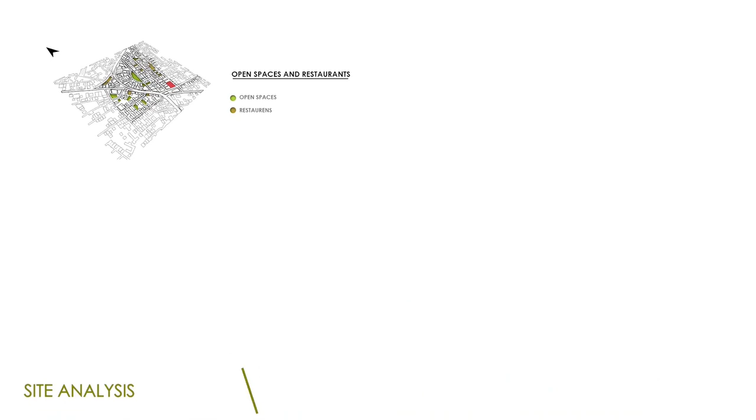The chosen site is located in Ambattur. Ambattur is located in the northwest part of Chennai city and remains an attraction for IT companies. The site neighborhood has adequate facilities like good transport, important landmarks, well-connected roads and restaurants. The neighborhood is majorly commercial and mixed residential. Dense traffic and sparse vegetation is found in the neighborhood.

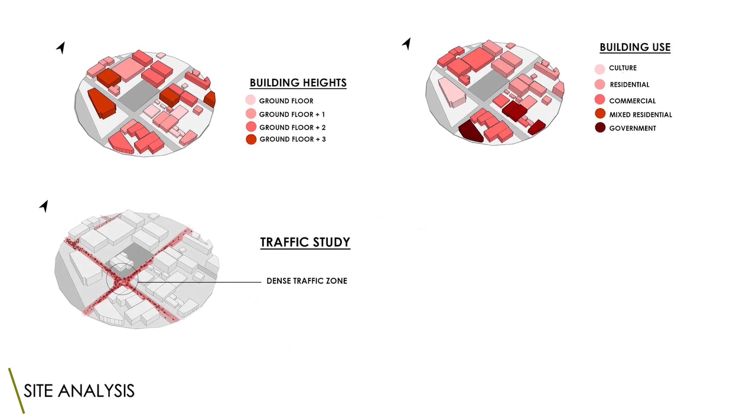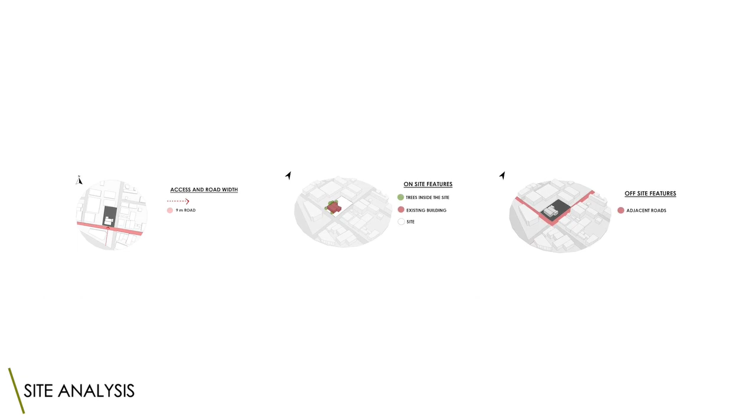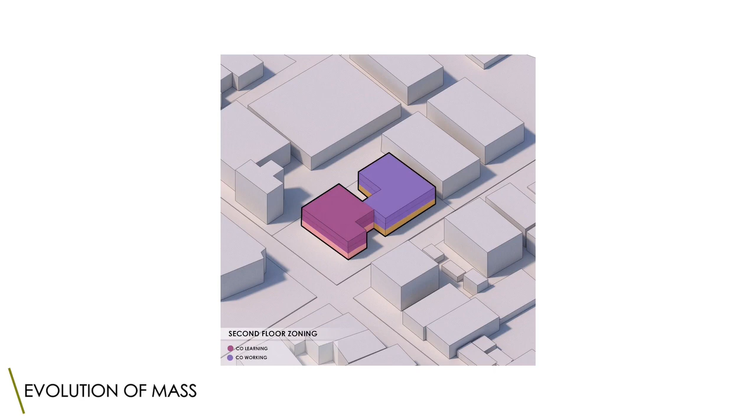The site is oriented towards south with a 9-meter wide access road. It contains an existing building, few trees and 2 adjacent abutting roads. Coterie Savanna, a meadow where multitude meet. The mass is generated by the extrusion of plane and subtraction of volumes with response to climate and environment. The spaces are consciously zoned based on functionality and accessibility, and integration of green spaces adds life to the mass.

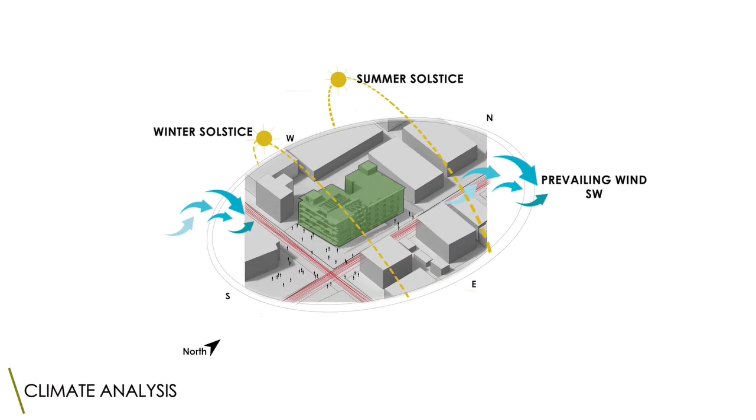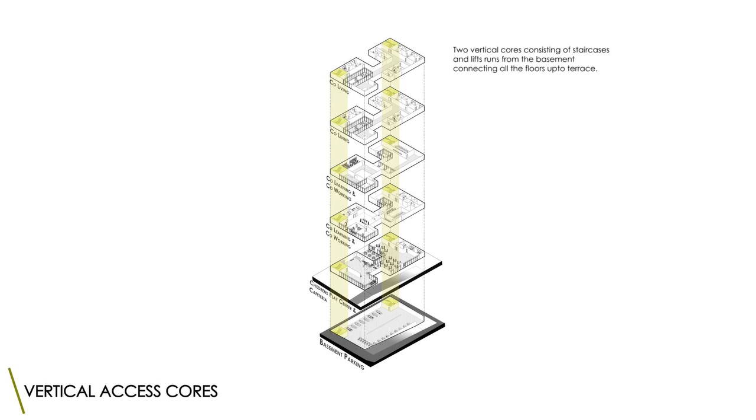The shorter span of the built mass is oriented towards south and the wider span towards east in order to receive optimum daylight, and the prevailing wind direction is southwest. The design comprises of 6 horizontal floor plates stacked together to form the mass. 2 cores run vertically from the basement and connect all the floor plates up to the terrace. Green spaces are incorporated on all the floors either in the form of outdoor spaces or indoor decks.

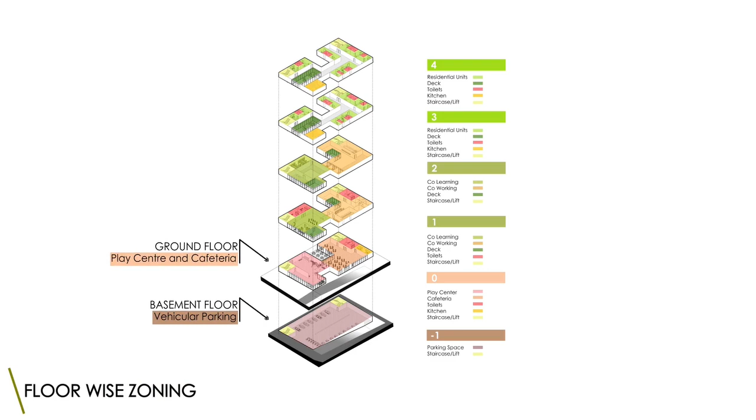The basement floor is dedicated for vehicular parking, the ground floor for play center and cafeteria, first and second floors for co-learning and co-working, third and fourth floors for co-living. From the ground floor, a ramp drops to the basement floor. The basement consists of 17 car slots and 20 bike slots. It is also provided with 2 staircases and 2 lifts.

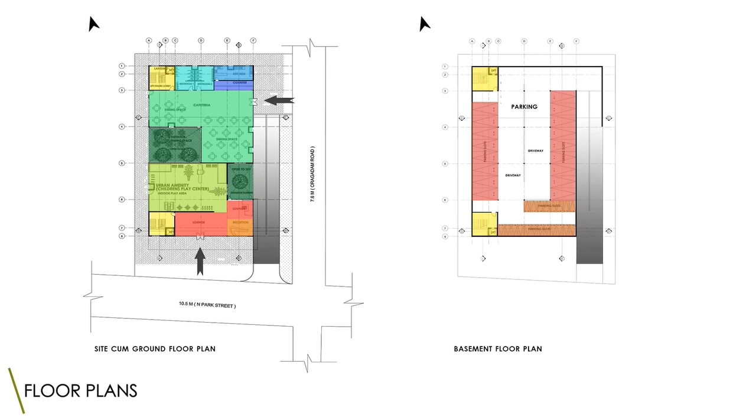The main entrance opens to a lounge and a reception in the right. The play area is partially enclosed. The second entrance opens to the indoor dining area on the left, a counter on the right and a kitchen behind it. 2 restrooms are provided and 2 cores are provided at the 2 opposite ends. An outdoor dining space and a garden area are provided in the carved out spaces.

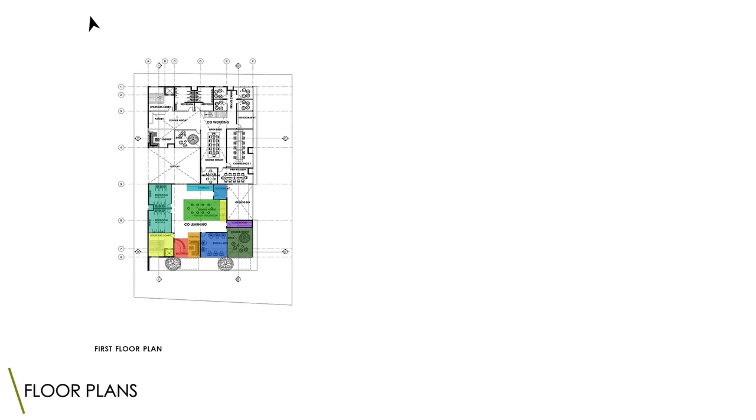Core 1 leads to co-learning space in the first floor. It consists of a reception and a waiting space, a double height discussion area in the center, restrooms in the left, storage and reprography, a space for digital arts, a storeroom and a double height indoor deck. A staircase leads to the other part of co-learning in the second floor. This floor contains a library, workshop and a storeroom.

Core 2 leads to co-working space in the first floor. It consists of a waiting lounge, a pantry, an open desk and an indoor deck which are of double height, and private meeting room, private desk, a conference room, reprography, 4 private cabins and 2 restrooms are provided. Another staircase leads to the other part of co-working in the second floor. This floor contains a conference, a lounge, 3 private cabins and an informal seating area.

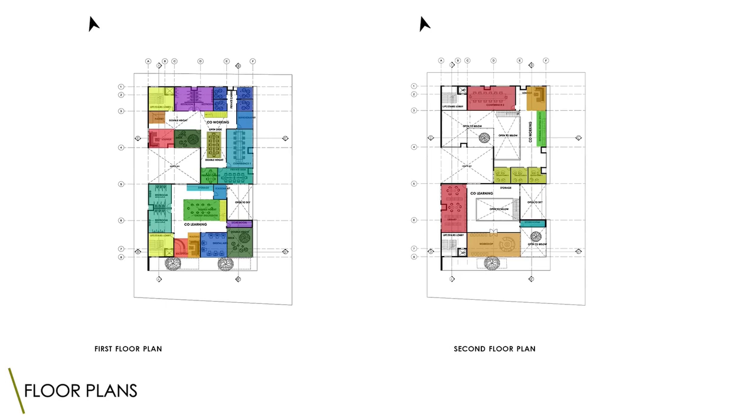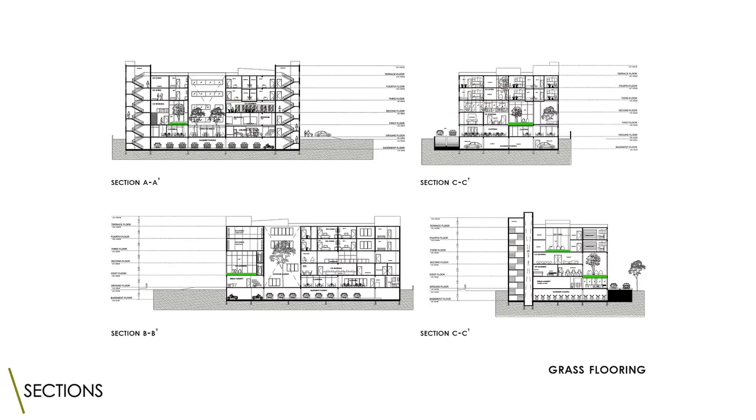The third floor consists of 10 co-living residential units along with a common kitchen and a double height indoor deck. The same is repeated in the fourth floor too. The sections are made to be dynamic by stacking, shearing and holes in the floor plates. The decks are provided with grass flooring and short trees to bring the essence of nature into the built form.

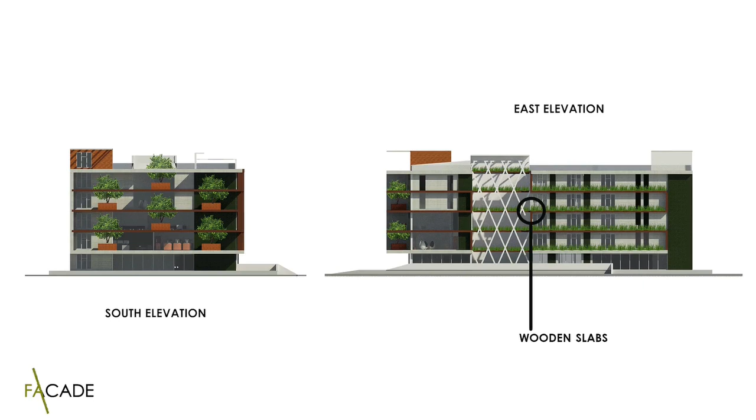The decks are well lit by using glass panelled walls and skylights. The facade made using wooden panels projecting from the built form acts as a shading device. Short trees are planted in the front facade to let partial sunlight into the building.